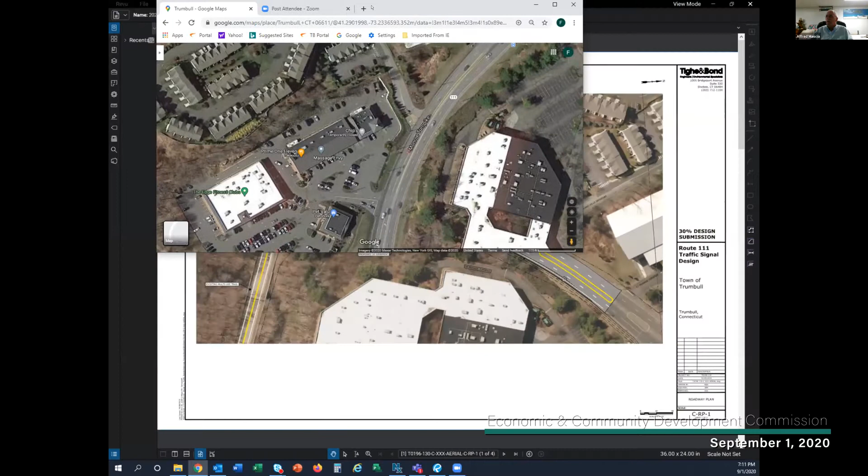This project is proposing a traffic light at the center of the shopping center. I'm going to switch to the drawing that shows that in much more detail. Apologize for it being turned, but north is still to the right. This is the overall plan showing the new traffic signal at the entrance to the shopping plaza. By doing this plan, we're eliminating the existing trail crossing. Just recently, about 6 months ago, the existing trail crossing was upgraded to a rapid flashing beacon light. That was going in knowing full well the shopping center was going to get the signal, but because of time constraints and safety, the rapid flashing beacon was put in. We do have plans for that in the future.

So what you're seeing here is the new traffic signal. Instead of having the trail cross Route 111 at the old location, we'll bring the trail up along the east side of Route 111 to the location of the signal, cross over. There'll be pedestrian push buttons to control the trail crossing, and then it comes back down the other side of Route 111 and eventually intersects with the Pequonnock Trail. So basically this solves an issue with the shopping center needing a traffic light and getting a traffic light working as a control for the trail crossing.

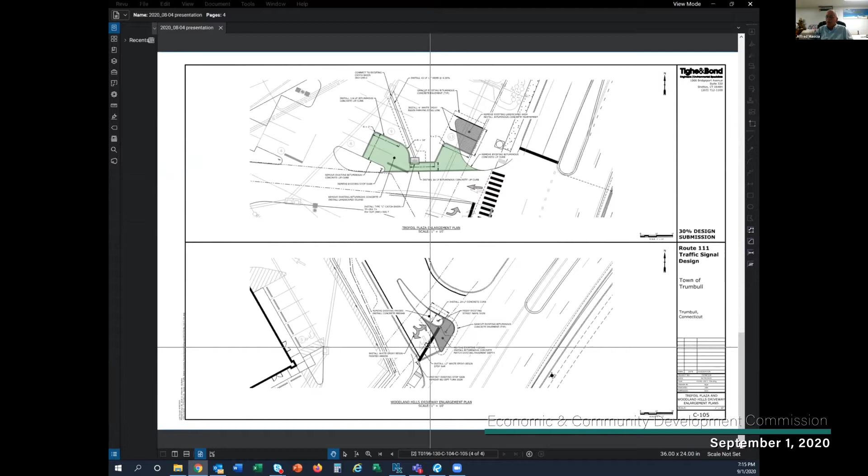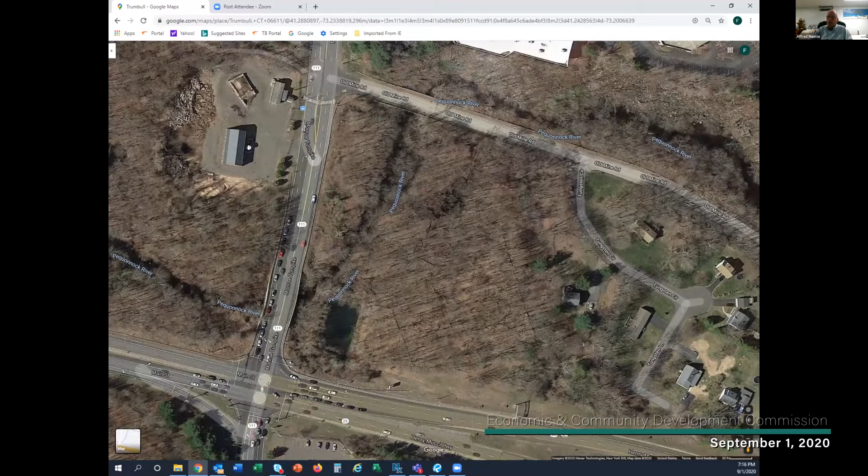Now I'm going to switch back to this other drawing. As part of our work with the DOT, they're requiring that this new traffic signal gets coordinated with the 6 signals going further north. So they will be - and Craig can answer those questions a little bit better than I - interconnected to the point that you won't hit a red light each time. They'll either all go red or all go green, working in unison. They'll be independent of the massive traffic signal operation down at 25 and 111, which operates totally independent of everything else. But the DOT wanted the new signal we're putting at this location to integrate with, I think it's 5 or 6 signals to the north.

And that's part of our plans. We did prepare 30% plans. We submitted to the district office of DOT and also went to the state Office of State Traffic Administration, it used to be STC, now it's OSTA. They have reviewed it. We've made some of the adjustments that they're looking for. Most of their comments were very minor in nature. We're ready to resubmit it back to them for them to give us a blessing on the signal.

The only glitch in that is we have to go next Tuesday night to the police commission. We need them to give us an official acceptance of a signal being located at this location. Once we get that letter from them, the package goes back to the OSTA and DOT, and they'll continue their review.

But as far as signals go, the DOT was brought in early on in this project, way back, I believe, in September, October, and the town requested they expedite the reviews, and so far they have. Normally getting a new signal could take years. We've already got, in less than 6 months, most of the comments we're going to get, and once we do our resubmission and response to the comments, we expect it to go very quickly. As far as the project is, we expect to get full approvals by late fall, early winter.

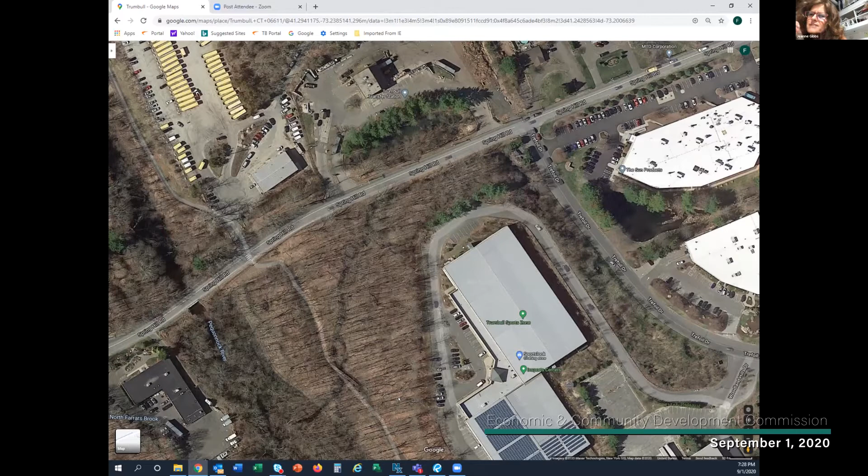Gene, did you have a question? I do, Jean Gibbs. I was just wondering, are there lampposts in that section? Because every time I drive by, it's during the day, and I never really thought about it until he just described it. I was just wondering, what does the lighting look like at night?

Does anybody know? I was just curious, are you talking about 111 or on Spring Hill? On 111, in between Old Mine and where the light's going to go. I was just curious, now there's going to be this really cool pathway.

How will it be illuminated at all? Currently that road is illuminated. If I may, this is George Estrada. There are hours of operation for the trail, so really, prior to dusk, the trail is closed. So we wouldn't have the same type of pedestrian concerns.

I am aware of the trail hours, I was just wondering. Next time I drive by, I'll take a closer look. Okay, any other questions on this presentation? Well, thank you, let's move on.

Ralph, I'm sorry, can I ask a couple of questions? Sure, couple of quick comments. First of all, I see a lot of changes from the initial presentation that was done at the town hall. God, what feels like 100 years ago, but I think it was just back in January. And I see a lot of the comments that at least one person made included here, so thank you for that.

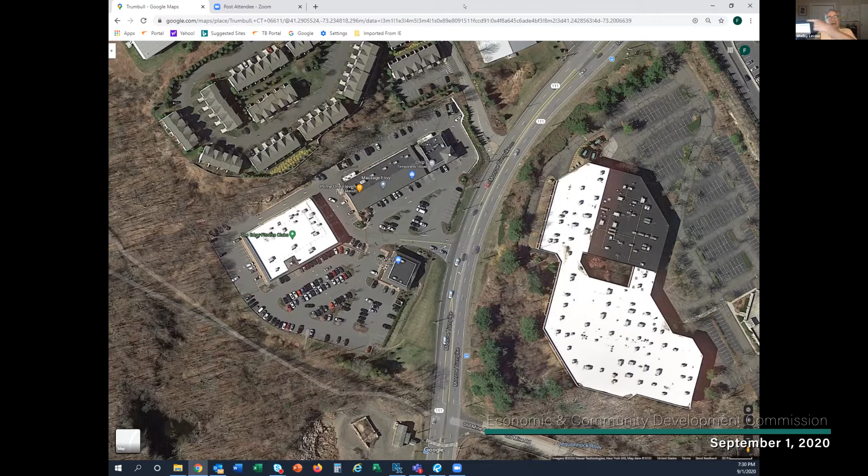One thing, just one person's comments - I remember there is a fire hydrant along what will be the trail, on that side of the road where the retaining wall is going to be. Were you able to move that, or is that not in the way? That is in the way, and we're going to have to relocate that a couple feet.

Okay, great, super, so that's not going to be in the road or in the pathway. That's great. No, we're going to actually relocate it so it's not at the edge of the trail. We don't want it to be a knee knocker on the back of the hydrant, so we're going to keep it a couple feet away from the trail. Fantastic, and 10 feet is great that you were able to squeeze that in. Congratulations, that must have been some difficult work to figure that out.

One comment on the exit from the 111 parking lot there - it still looks like a fairly wide angle turn. Is that going to be flagged no turn on red? My concern is cars that are leaving will look up the road and not see a car, and because of the turn radius being fairly broad, they'll be able to roll through that pretty quickly, and that puts pedestrians right in their path. I see it as a pedestrian, I see it all the time, and I'm wondering whether that will be flagged no turn on red, and attendant to that, whether it'll be a dedicated pedestrian crossing on the push button.

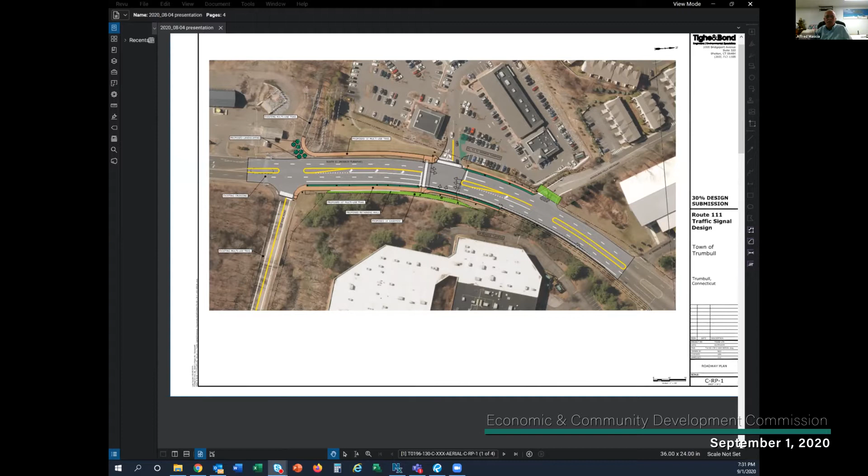Yeah, I'm going to put him on the spot and have him come in and at least answer that question. This is Craig Yannes. So you're talking about southbound on 111 for the right turn on red? Right, cars exiting the parking lot to turn south on 111, yep. Oh okay, exiting the parking lot, okay.

So we have looked at that, we've discussed it with the state. As of right now, we're not going to put a restriction on right turns. What we do have here is an overlapping right turn out, so when the northbound left turns go, the right turns can go out of the plaza, so that gives us some extra capacity. So if we were to put in a right turn restriction, we could do that, not too much effort. In terms of that, what guides that is that the sight lines are acceptable up the hill, but acknowledging that the speeds are very high. So it's definitely something we've thought about, and we'll take another look at it again with your comment in mind. And what was the second part of your question?

I'm sorry, well to be clear Craig, thank you, but to be clear my concern is not about the traffic coming down the hill. My concern is about the pedestrians crossing in front of the exiting traffic, and cars turning right really need to look to the right. So okay, and that was the other part of your question.

So the state's new directive is that all crossings, or as many crossings as they can do, are concurrent, meaning vehicles moving at the same time as pedestrians. We've made a strong case here, and we do have an exclusive pedestrian phase for both cars crossing the driveway and crossing 111, so that will definitely be part of the project. Great, thank you.

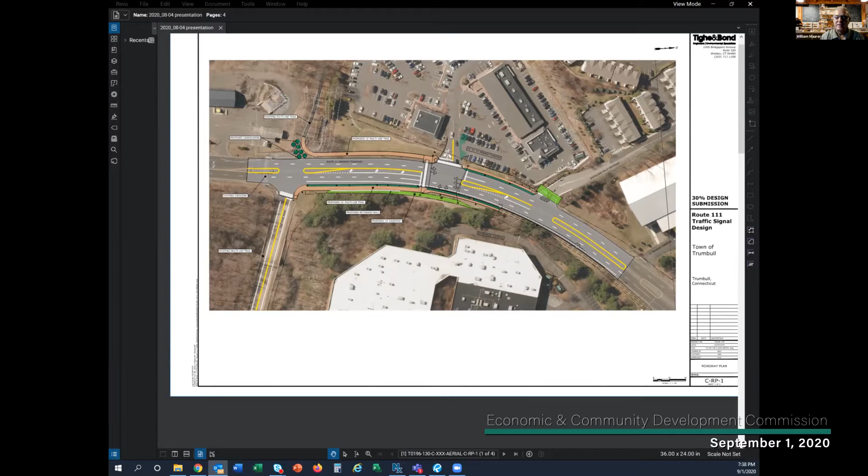Sure thing. There we go. Hello everyone, this is Gary at Stantec. Raina and Bill, give us screen control. We'll share our screens. You should have the ability to share your screen. Got it, it just popped up. Thank you.

All right, let me call up, we have a presentation for you. And Raina gave you quite a bit of background. Can everyone see my screen? Not yet. Just give a shout when you can see the cover slide. Not yet. Bill, have I done everything that I need to do?

So the first step is to open the presentation, and then it's second step to hit the green share screen button, and that'll bring up a window. Once that happens, select it and hit the share button. Gotcha, I've been more familiar with Teams recently, so apologize. Let's see, just to make sure I select the right one. Here we go. Share. How about now, how are we doing? Good. Okay, all set? Yep.

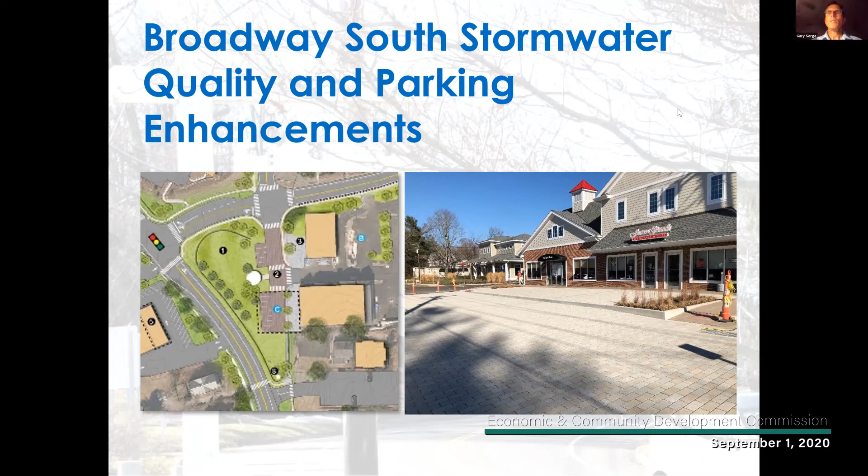Alright, so we'll move forward to projects that are ongoing. We have the Main Street sidewalks, the Main Street and Whitney Avenue traffic signal, and the Whitney Avenue sidewalk connection to the Pequonnock River Trail. We're calling this phase 1 and phase 2, because there's a portion that's been bid and construction will be underway shortly, and a phase 2 portion which will take the trail from Dunellen Road down to the PRT at Whitney Avenue.

Kent's going to help me with some of the technical details of the plans I'm going to share next. Let's look at those three projects in this color-coded scheme. The Main Street sidewalks are shown in red, and the extent will be from Gisela Road up to the intersection of Whitney and Main. It'll also extend from the northern portion of the former Marissa's site up to Whitney Avenue and make its way down towards Broadway. What you're seeing in red essentially defines the connectivity grant and the new sidewalks that will be on Main Street.

The Main Street and Whitney signal is essentially the area you're seeing here in yellow. It includes a reorganization of the curb cuts on Main Street, namely the west side, and it'll involve some traffic lane configuration as you're approaching the intersection from both the north and the south. We'll have another plan that Kent can refer to in a second.

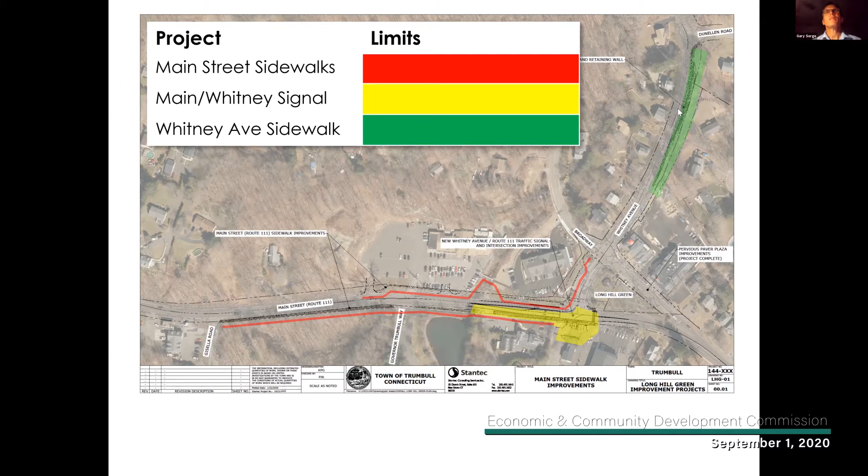And then the Whitney Avenue sidewalks - this is just showing us connecting down to Dunellen Road, that little green mass you see in the top right-hand corner of the illustration. It will continue in this phase 2 from Dunellen down to the Pequonnock River Trail at Whitney Avenue, about the same distance as you're seeing here in green.

So the Main Street sidewalks, Kent, do you want to share some of the details behind the Main Street sidewalks project, where it stands and what we're currently working through? Yeah, I can share that. So the Main Street sidewalk project we've been working on for the past year or so here.

This has been reviewed by the DOT district and also by DOT hydraulics unit. The reason it was reviewed by the hydraulics unit is there's a modification of the existing culvert that transects the road west to east, north of the Whitney Ave intersection. With this modification, there's actually a floodway attached to the broken culvert. So we've gone ahead and completed a study that proves the modifications we have planned will have no adverse effects to the waterway.

And that's essentially where it stands. We have the comments back, so we'll be addressing those shortly. We also have some easements that are going to be required in order to construct this sidewalk, and Bill may be able to fill in exactly where those stand a little bit more than I can. But what we've tried to do is keep this 5-foot wide sidewalk separated from the roadway to provide a nice green snow shelf and a little buffer, so it's a little more comfortable if you're walking along the roadway. You're not right up against the road, but in order to do that in a couple locations, there'll be some sidewalk easements needed from the adjacent properties.

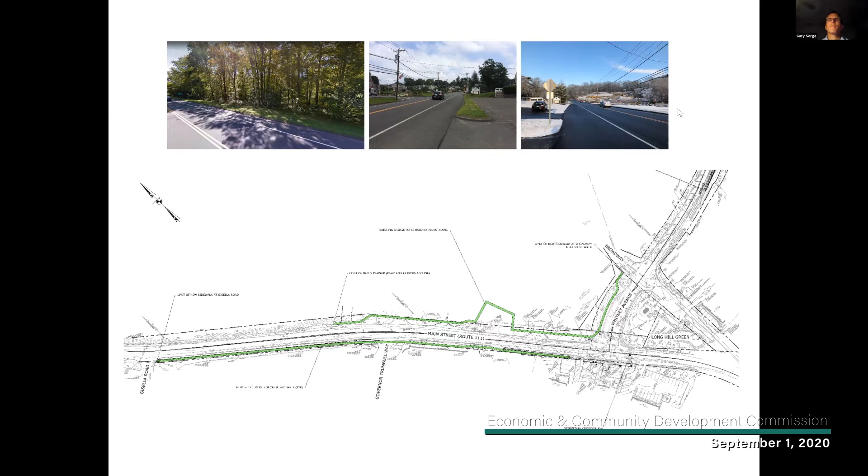Okay, and then we have the Whitney Avenue and Main Street traffic signal. Kent, do you want to share some details here, and also maybe the question that was asked earlier about the pedestrian prioritization? You might want to shed some detail on that as well.

Yeah, sure. So same thing as the Main Street sidewalks, the DOT district office has reviewed and provided their comments. Nothing too major came out of those. We are still awaiting the DOT traffic department comments from the main office in Newington. We were actually promised those a couple weeks ago, haven't received them yet, so we'll be following up in the next couple of days, hoping to get those.

Our signal, obviously there's not a plan on the screen here. Gary, do you have a plan? Yes, next slide. We did have a preliminary meeting, I forget the date, I think it was maybe last summer, where we met with the district and also traffic engineering from Newington. So we went over the design of this Long Hill Green intersection. It's actually slightly changed from what we've seen here. This plan, I think, was actually taken from when we met with the traffic, or the police commission.

So what came out of the police commission meeting was they had suggested we relocate the crossing at Route 111 Main Street to the north side of the Whitney Ave intersection.

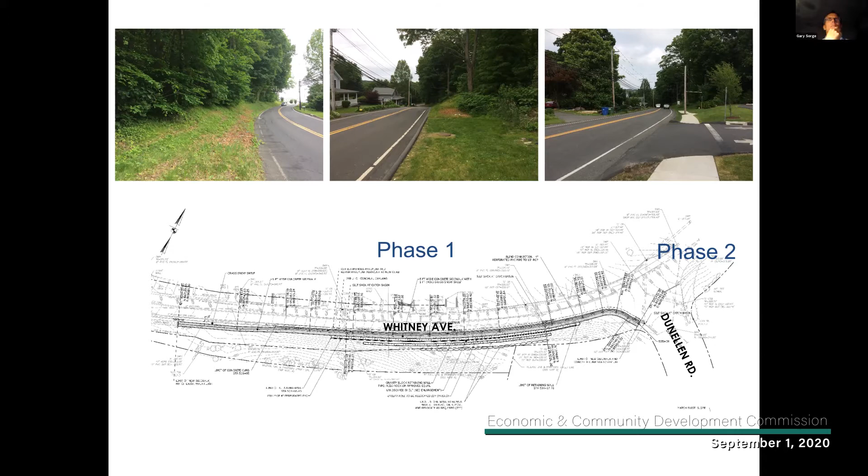I believe we have a before and after. This is a section along the steeper portion of the sidewalk length. We will be cutting into that slope and creating this walkway. The engineered blocks are similar to what was discussed earlier, large segmental blocks with a more natural appearance. They're capped off so we can bring plantings right over the top, so they don't have that engineered commercial look, fitting within the local context, more natural and New England-like, with a mottled finish on the concrete so it looks like a natural condition instead of a rigid engineered wall.

It will be terraced so there's an opportunity for maintenance, to blow snow to the first level without having to compete with the tallest wall. It's a stepped wall, so we break down the height and it doesn't seem as daunting to folks actually walking on the sidewalk.

And it'll be appropriately landscaped. There will be tree removals, but there is a planting plan to restore those trees that will be here for the next 100 years. We have talked to one of the local residents who is right on top of the project. We've kept them apprised of the work and the construction, and they've been on board.

and looking forward to the improvements. We just want to keep them apprised of the work going forward. And I believe that's what we have.

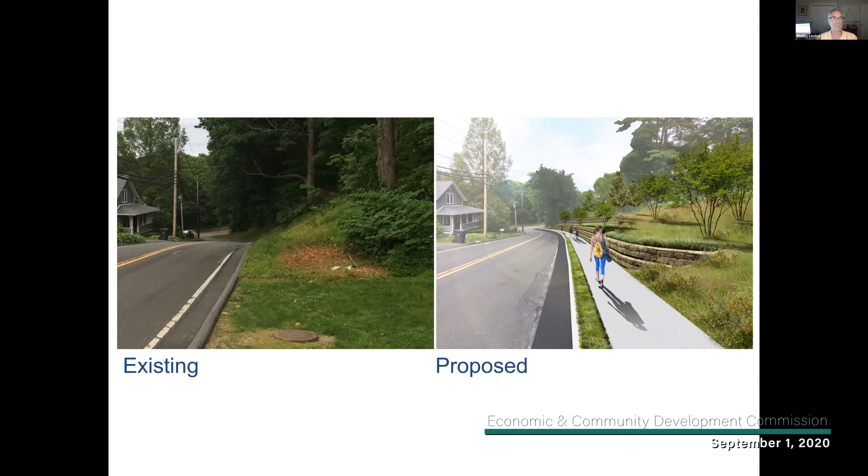The issue is, and I realize we moved the crosswalk from the drawing from the south side to the north side, but if you're coming out of Long Hill Green and heading south on 111, you've got to navigate two crossings, which is not as easy. And so what we'll end up doing is encourage people to walk not on the crosswalk because it's shorter, because pedestrians are lazy. Yeah, that's a good question.

As Kent had pointed out, the crosswalk here will be situated and located to the northern part of Main Street. Kent, if I'm not mistaken? Yep, that's correct. The police commission was fairly adamant about it. With traffic coming down the slope, they were afraid someone would overrun the traffic signal and a pedestrian in this crosswalk would be more at risk.

We don't believe, Shelby, that in the future a crosswalk could not be added. Then you can complete the trifecta. But at the present time, the police commission was most comfortable going ahead with the crosswalk at this location as opposed to the southern location. But again, we're not doing anything here that would preclude that crosswalk from being striped out in the future. Great, thank you. You got it.

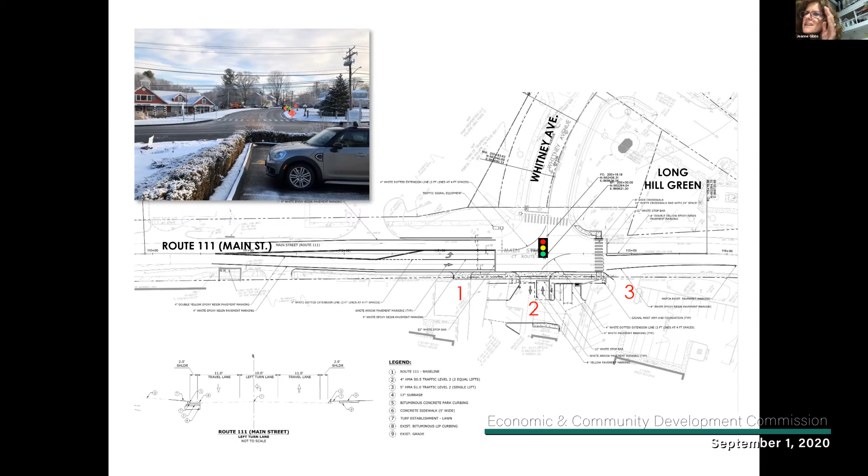I have two questions. In any of these phases, will any of the wires, the telephone wires, be altered or consolidated in any way? And the second question was, over by the gazebo area, will there be outlets there, like for some type of event or something?

I believe there are connections already within the green, I just can't remember exactly where, Jeanne, but I know they're there. Though this project does not involve any relocation of wires, we do have some utility poles along Whitney Avenue, and there are some guy wires that Ken could shed more detail on, some tied across the roadway to the other side of the street, but they're support wires, not power or communication lines.

When we were working on the green plan, we did communicate with the electrical companies and other utilities, and we came up with an idea and strategy to take the wires that are now hanging over the green, going east and west, and move them out so they align with Main Street and cross the intersection, making their way along Whitney Avenue, removing the wires from the airspace directly over the green and over the plaza. If you're out there now, you'll see how low they're hanging and how heavy they are. But these were just discussions, and there seemed like there was a way of doing that and consolidating.

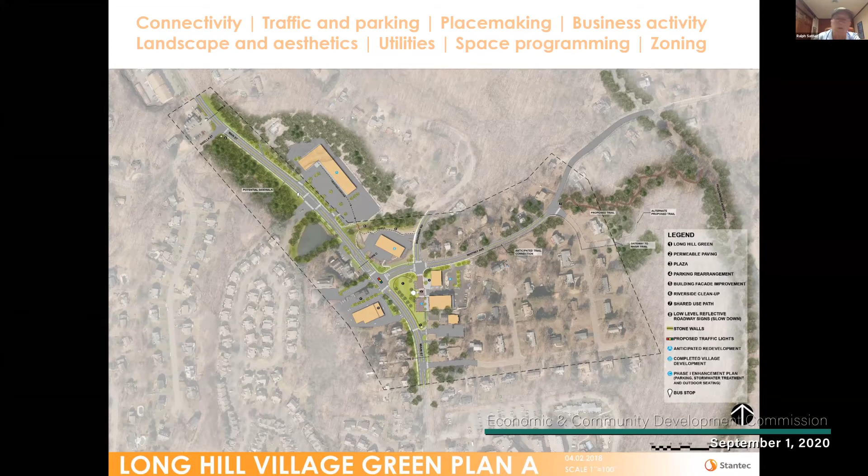Thank you. Okay, let's move on to the director's report. I guess the presenters can take their leave unless, Rena, you think there's something else. No, I don't think they need to talk about, we don't need them for anything else. The next time we'd be sort of in this kind of a group is when we have that town hall meeting that I discussed earlier that we're going to be setting up, that will include public infrastructure projects like these, probably some more information on the Pequonnock Trail that's going through Trumbull Center as one of the ongoing public infrastructure, some of the stuff Bill's working on in the Strobel Road area. All these other projects will be included in that town hall. So again, we'll be getting it out and we'll be seeing some of these same folks again.

Okay, well, thank you very much, very thorough. Thank you for the opportunity, everyone. Have a good evening. Thank you. Thank you.

Now we're on to the director's report. Okay.

So much has happened. I said if we were going to do our breakfast in October again this year, I would open my lineup saying, well, that didn't go as planned. Right now, that annual breakfast, I have a holding date for November 6th, but folks, I don't see that happening as any kind of in-person gathering. Maybe I'm wrong, I don't know what the future holds, but it doesn't look promising. One thing I wanted to talk about was deferring that to the spring, because I do think an in-person gathering has great value for networking, for enthusiasm, and so forth.